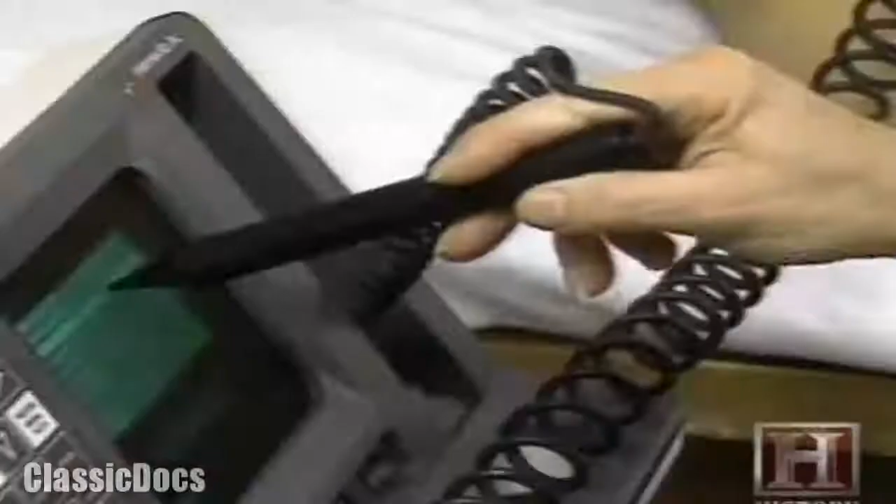Over the next century and a half, we took a world which had dominated us and transformed it into this: an electrified environment which responds to our every need. We control our climate, process information, and tend to our health with power that flows hundreds of miles across an interconnected transmission grid that encompasses the entire country.

Electric current, the flow of charged electrons, intimately influences how we live, yet most of us understand little about how it works.

In 600 BC, the Greeks first discovered that static electricity could be generated by rubbing amber. It wasn't until the 18th century, however, that Benjamin Franklin theorized that electrical fluid might be composed of particles. By harnessing this flow of electrons, or current, inventors and industrialists more than a century later laid the foundation for what would become the colossus of electrical generation, the modern power plant.

It can be anything from a red-hot behemoth that once started consumes trainloads of coal without interruption for years, or it might be a nuclear plant, incongruously perched at the edge of the shimmering Pacific Ocean, a plant that on its own produces 20% of Southern California's energy.

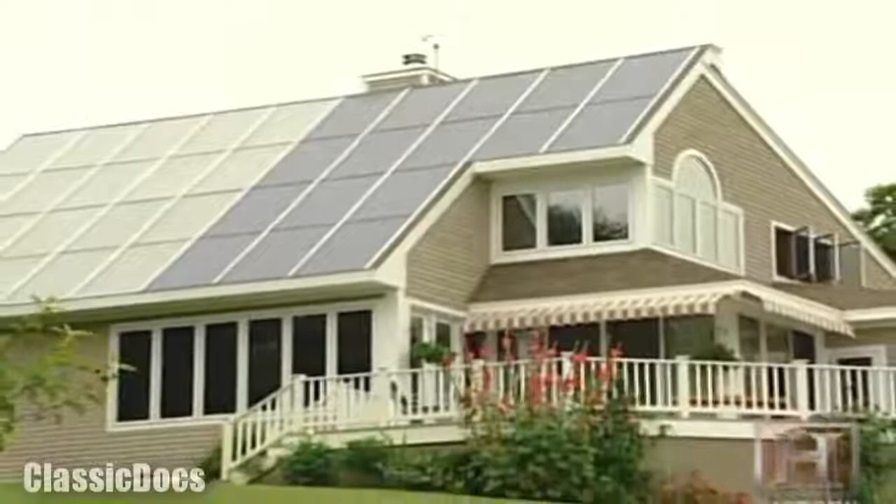Or maybe it is simply this: a house that generates more energy than it consumes and returns that surplus to the electrical grid for public use, a new model for the future of power plants.

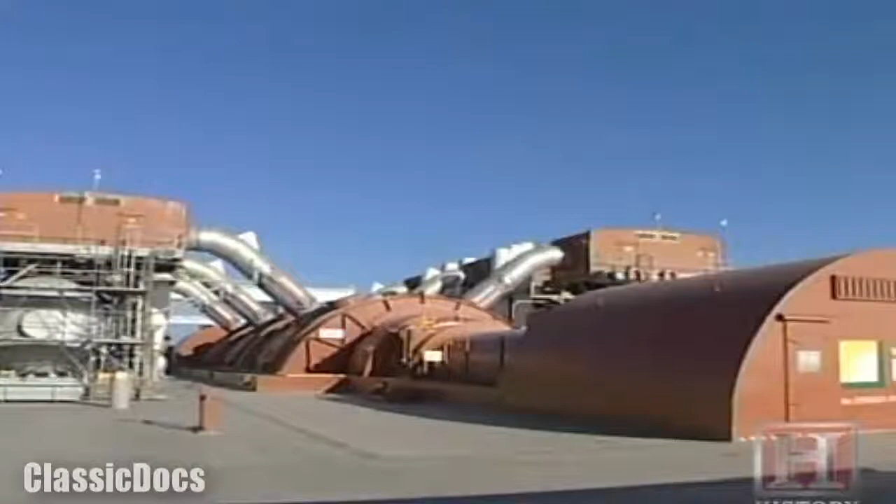But whatever guise contemporary power plants take, the basics of their design and their integration into commercial and domestic life were forged more than 100 years ago in a conflict between two giants of industry and invention, Thomas Edison and George Westinghouse. The outcome of the fierce competition between these two men would ultimately dictate how electricity would be generated and transmitted. But their first battle would be waged over how to bring safer light to the cities of America.

Early natural gas lighting systems in homes, for example, on occasion were quite dangerous. They had no shut-off valves, so if the lamp went out, the gas would continue to accumulate in the home, and they had some major explosions in homes.

In 1879, Thomas Edison invented the first commercially practical incandescent lamp with a high-resistance filament that glowed when heated by a low current. He soon followed this with designs for a complete distribution system for light and power.

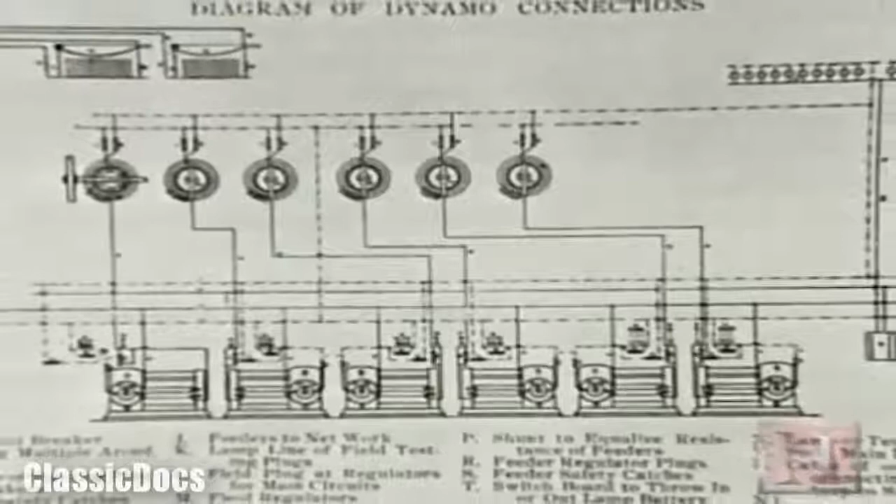On September 4th, 1882, after delays and cost overruns, Edison opened the first electric utility, the Pearl Street Station, in the heart of Lower Manhattan's financial district.

Edison knew that his product was going to be expensive and would need to reach many customers. The whole reason for Edison's Pearl Street Station in New York City in 1882 was to demonstrate that electric technology could be used on a widespread basis, not serving one customer like steam engines in old factories, but many, many customers. Edison's choice of direct current technology at Pearl Street limited his power plant's range.

The major disadvantage to direct current power in power plants at the time was you could not transmit electric power very far without losing a tremendous amount of the current. So you needed a power plant every half mile or mile throughout the city.

Edison's main competitor, George Westinghouse, saw that electricity's future was in long-distance transmission. Westinghouse put his company, Westinghouse Electric, to work at perfecting a system using alternating current, which flows in reversing waves which propagate more easily and with less resistance in a transmission wire.

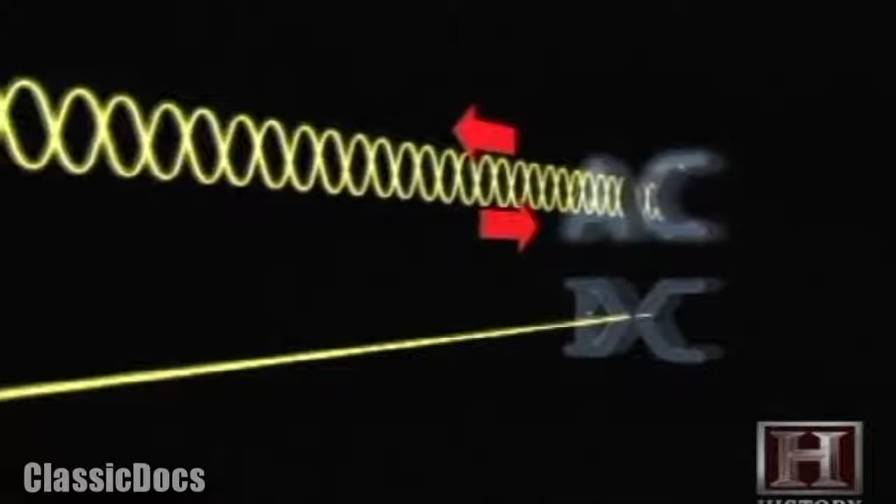The beauty of alternating current is that you can generate that at a very high voltage and then step it down essentially to any voltage that you need. So you could step it down to a very low voltage that somebody would need at a house for their lighting, or you could step it down to a somewhat higher voltage that some business might need or some factory would need.

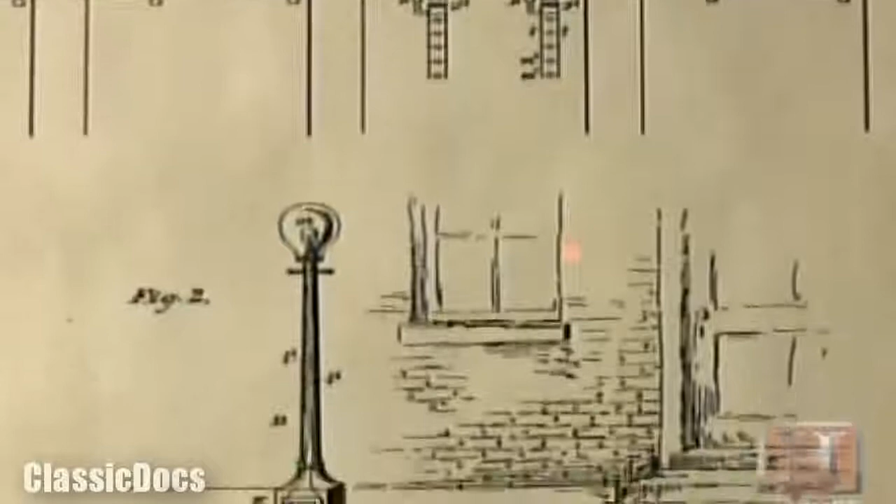George Westinghouse purchased several vital alternating current patents from Nikola Tesla, a Serbian-born inventor. Westinghouse recognized Tesla's genius and brought the inventor to Pittsburgh to work for him. Together, they designed the components necessary to alternating current's success. In 1887, George Westinghouse invented a meter for alternating current.

He thought if you were going to make alternating current commercially available, you were going to have some way of measuring what you're going to sell to your customers.

Westinghouse's aggressive pursuit of alternating current technology put him in direct conflict with Edison. It was a battle of business and technological giants, Thomas Edison versus George Westinghouse. This is called the Battle of the Currents, and it was essential because the technology that won would dominate the industry for the remainder of the foreseeable future. With so much at stake, it's not surprising that the Battle of the Currents took a bitter turn.

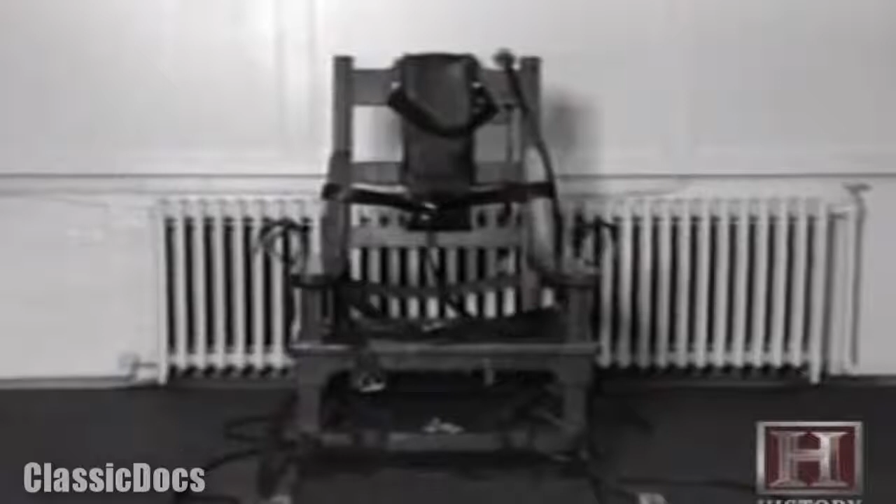Edison went so far as to lobby New York State officials to have his competitor's product, alternating current, used to execute condemned men at Sing Sing prison. I guess perhaps the lowest blow is when they were looking for a word to describe this. Today we say a person is electrocuted, but at the time they didn't have a term, and Thomas Edison suggested that they use the word Westinghoused, that the condemned man was Westinghoused. And obviously it's very, very upsetting to George Westinghouse.

But Westinghouse focused on the industrial competition at hand and left the courting of public opinion to his adversary. There was a great World's Fair coming up in 1893 in Chicago, and they asked for proposals to illuminate the fair, to light it at night, realizing that nowhere in the world had a major event ever been illuminated at night before. Westinghouse bid $500,000, half of what Edison bid, and was awarded the contract.

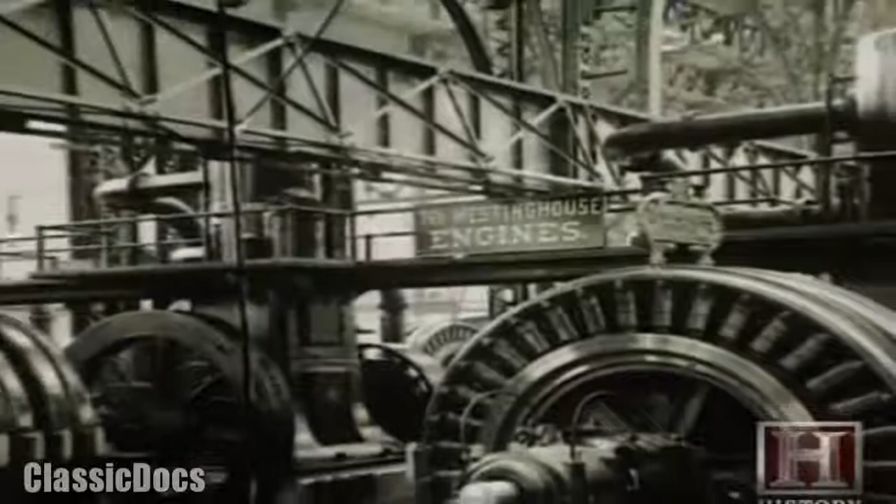He took advantage of the opportunity to promote his product. So he installed a complete alternating current power plant that was on display for everyone to see. It had a giant Westinghouse alternating current switchboard, and the impressive part of that was that there was only one operator. One operator could control all the electrical equipment for the World's Fair of 1893.

27 million Americans and foreign visitors attended the Chicago World's Fair of 1893. Tesla and Westinghouse made sure that they left the fairgrounds with a good idea of who was winning the Battle of the Currents. Both George Westinghouse and Nikola Tesla realized this was an opportunity to really showcase the potential of alternating current. One display, they had this huge word, power, and at night there were electrical currents, just like little bolts of lightning flashing all around this illuminated word.

After this dramatic success, Westinghouse was prepared for his greatest challenge, competing head-to-head with Edison for the right to build the largest power plant in the world.

Niagara Falls. For hundreds of years, men had understood that the power of falling water could be converted into mechanical energy, the energy to run mills. But by the 1880s, there was open debate over whether the falls should be harnessed with this old technology or transformed into electricity and transmitted to industry and individuals hungry for power.

If we look at Niagara Falls and the potential for generating power, it was obvious to a lot of intelligent men at that period of time that there was a tremendous amount of power in the water coming down over Niagara Falls. If it could be harnessed, it could do great things for industry.

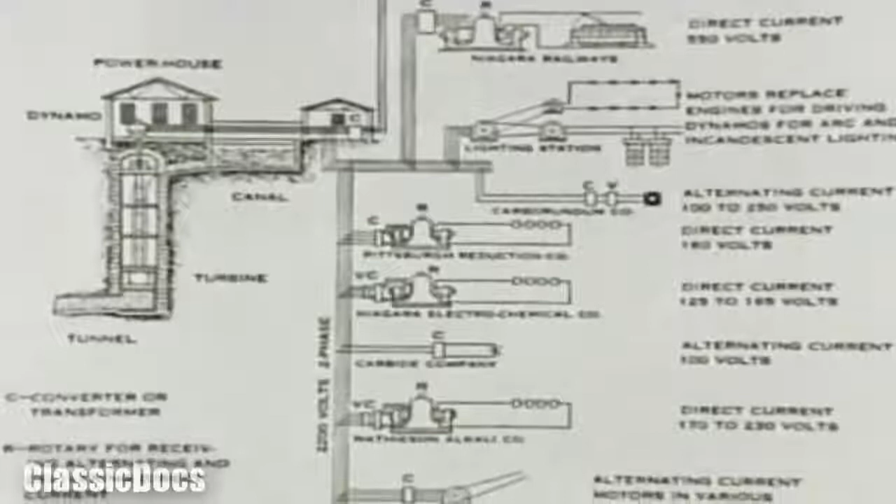The International Niagara Commission solicited plans from leading engineers to design a plant that could transmit electricity to nearby Buffalo's manufacturing interests. This was a dramatic opportunity for George Westinghouse's alternating current system. Ultimately, the decision to choose alternating current, which could be pushed much further distances over transmission lines from the powerhouse, won the day for alternating current.

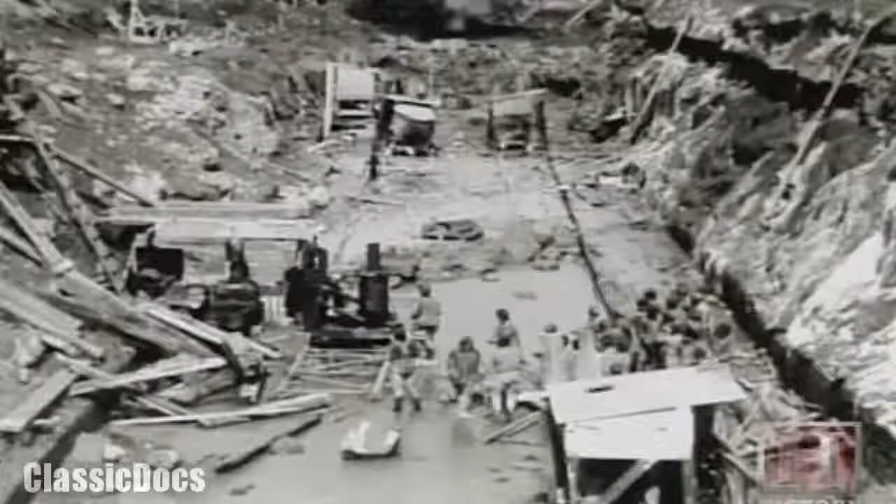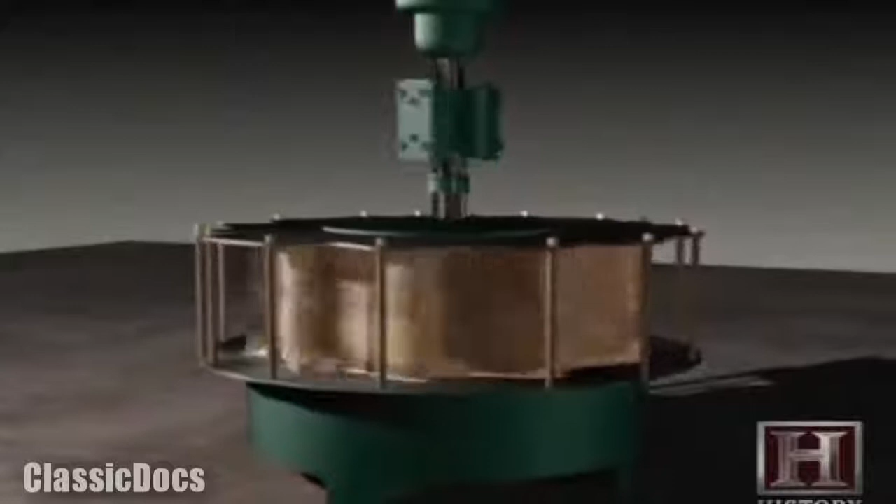It took from 1892 to 1895 to build the tunnel that would divert the force of the Niagara River to the plant's turbines. During the summer of 1894, electric cranes eased the 29-ton turbines, the largest built to date, into the wheel pits. The turbines were essentially windmill blades that could be driven by the force of Niagara's water.

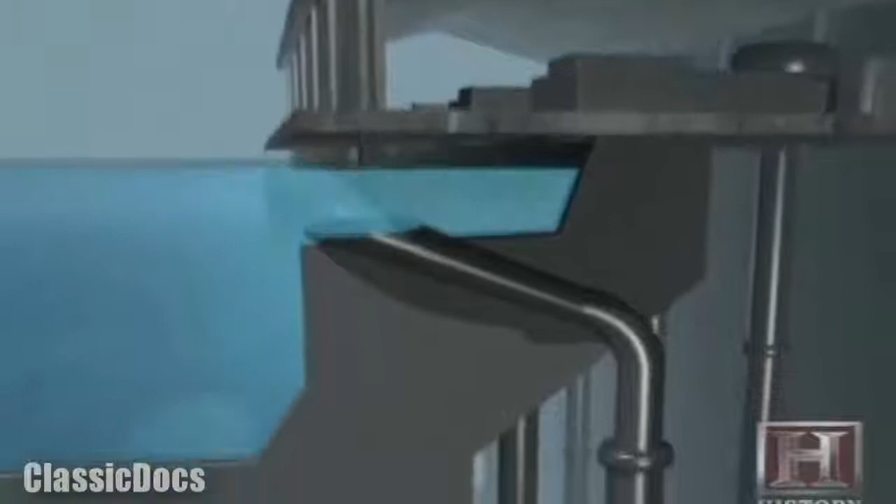When the plant was finished, water flowed through the forebays and into the penstocks, vertical pipes about 8 feet in diameter, before entering and driving the turbines, which in turn spun rotors beneath the generators. Inside the generator, a magnet spun, creating a magnetic field which induced an electric charge in a casing of copper coils, thus producing electricity.

In 1896, the Niagara Power Station began transmitting power 17 miles to Buffalo, New York. But it wasn't until 1901 at the Pan American Exposition on the Buffalo Fairgrounds that the general public was able to witness a large-scale display of the wonder of long-distance electrical transmission. In order to transmit electricity over this distance, transformers at the plant increased voltages to 11,000 volts, 4 times the voltage of an 1891 plant that Westinghouse had built.

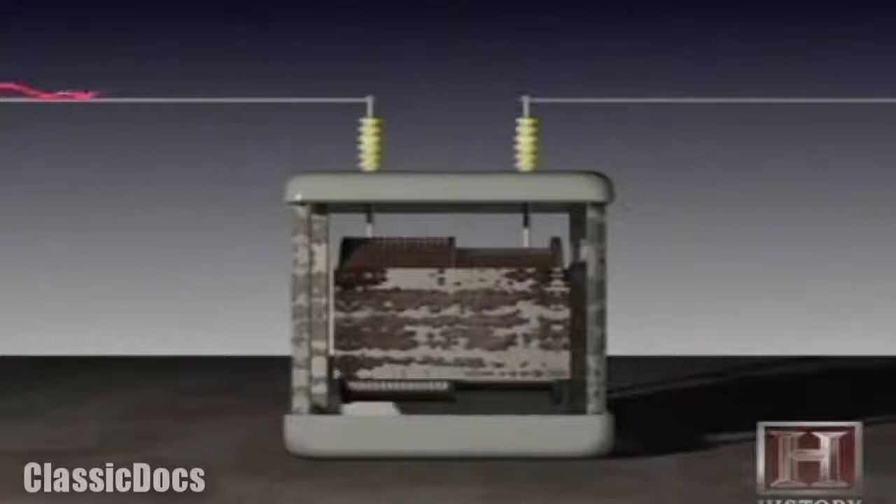Inside a transformer, an electric charge passes through one wire coil, inducing a higher or lower charge in another separate coil. Voltages multiply at the ratio of the number of turns in the secondary coil to the number of turns in the primary coil.

What the Westinghouse engineers understood very clearly was that large power plants, which could produce large amounts of electricity and serve larger numbers of people over a wider area, needed the use of transformers to increase the pressure of electricity, to be able to push it longer distances.

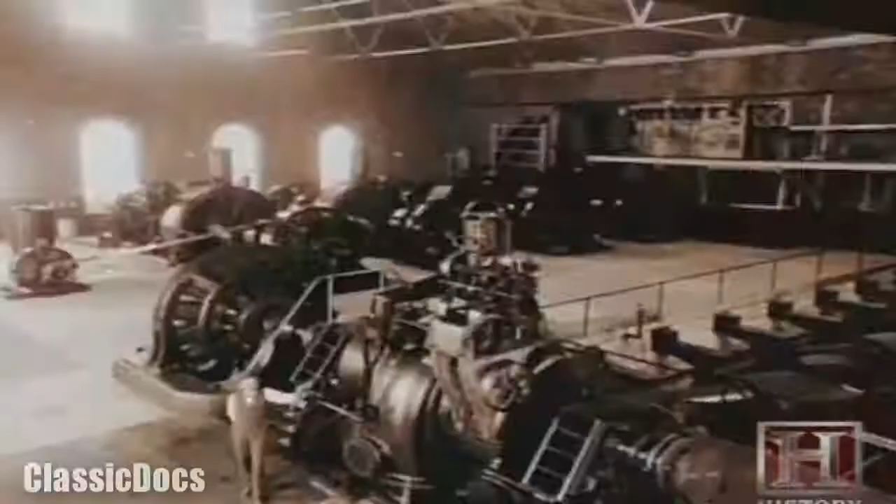The Niagara Power Plant provided not only a technical blueprint, but also an economic model that would be duplicated time and again over the coming century. If you build it, they will come. Heavy industry, in this case, would congregate around a reliable, cheap energy source.

There was a fellow in Pittsburgh named Hall who had an early process for producing aluminum using electricity. So he moved his company from Pittsburgh to Niagara Falls. When the power became available, that company went on to change its name to Aluminum Company of America, and as we know today, it's the largest aluminum company in the world.

It soon became clear as electricity flowed out of the Niagara Power Plant that alternating current was here to stay. After Niagara, even Edison abandoned DC for AC technology. I think it would be very fair to call George Westinghouse the father of the modern power plant. He was the catalyst, the person who had the commitment over this 10-year period of time to pool the resources to make alternating current successful.

In the ensuing decades, improvements in the electrical engineering of turbines, generators, and transformers would lead men to dream of a bigger and better source of water power. This dream would culminate at Hoover Dam, 40 years after the first electricity flowed out of Niagara.

At 726 feet in height, weighing in at 6.5 million tons, and forming a 150-mile lake, Hoover represented a stunning increase in scale to Niagara and is still one of the world's largest dams. Hoover's transmission voltage of 287,000 volts speaks to the engineering leap that had taken place.

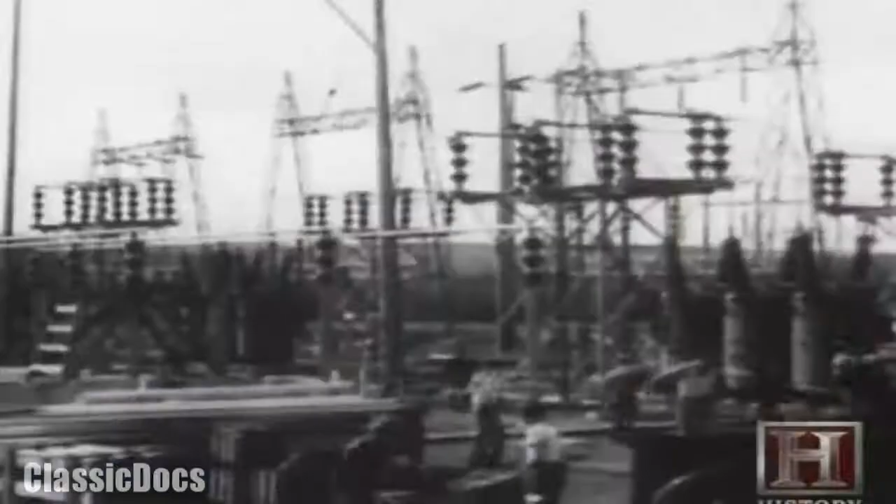A number of people compare Hoover Dam with the earlier Niagara Falls installation. The difference between the Niagara Falls of the early 1890s and the Hoover Dam in the mid-1930s is the improvements in technology over that period of time: larger, much more efficient generators, and most importantly, very high voltage or high pressure transmission systems.

Whereas people 17 miles away from Niagara Falls could receive electricity in the early 1890s, by 1936 and 37, when power was coming out of Hoover Dam, it was going over 250 miles to Southern California.

In the decades between Niagara and Hoover, privately owned power companies flourished throughout the country. It did not take long for company owners to realize that consolidation was the only way to profit in an industry that required so much investment to build infrastructure.

Tom McCarter had been the Attorney General of New Jersey. His idea, which was very novel at the time, was to basically draw a line between New York City and Philadelphia and buy up all the municipal light and gas companies and traction companies that existed between those two major points. By doing so, he was able to generate the critical mass necessary to go out and begin to fund the tremendous infrastructure that was going to be required to build the electric system.

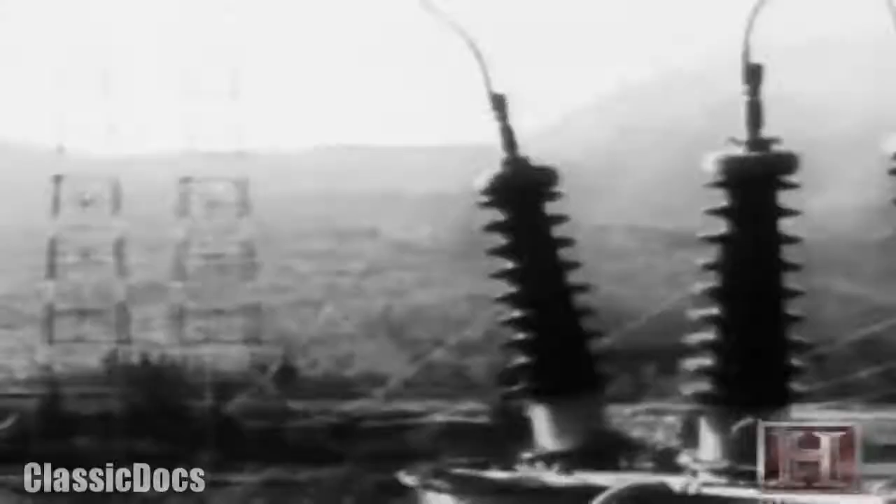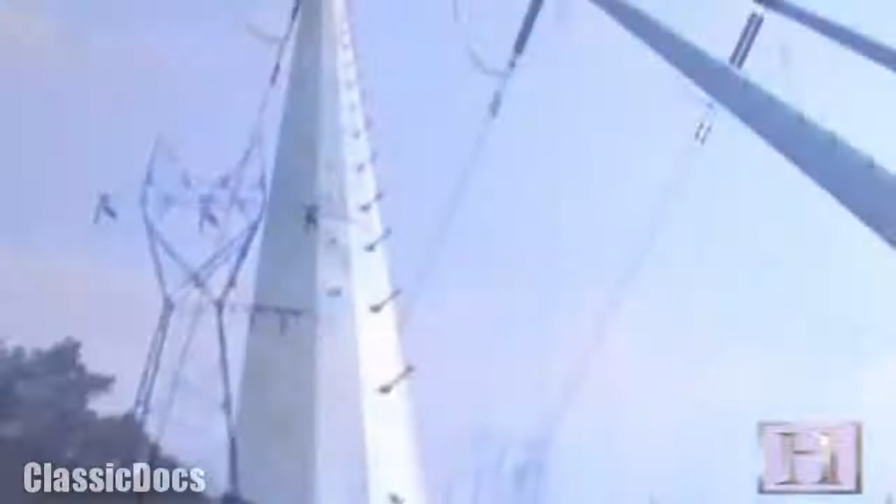It was also a major step in the growth of the transmission grid. More customers meant greater revenue, and an expanding utility could afford the expense of running transmission lines, linking multiple plants into a regional grid. This system spawned the giant interstate power transmission grids that today cover thousands of square miles.

Improved transformer technology and higher voltages meant electricity could be sent farther and farther. By 1908, you had over 100,000 volt technology, which meant you could push that electricity 150 miles or more. By the early 1920s, you had 220 and 230,000 volt technology, which meant literally anything within a range of about 300 miles of the power plant could receive electricity.

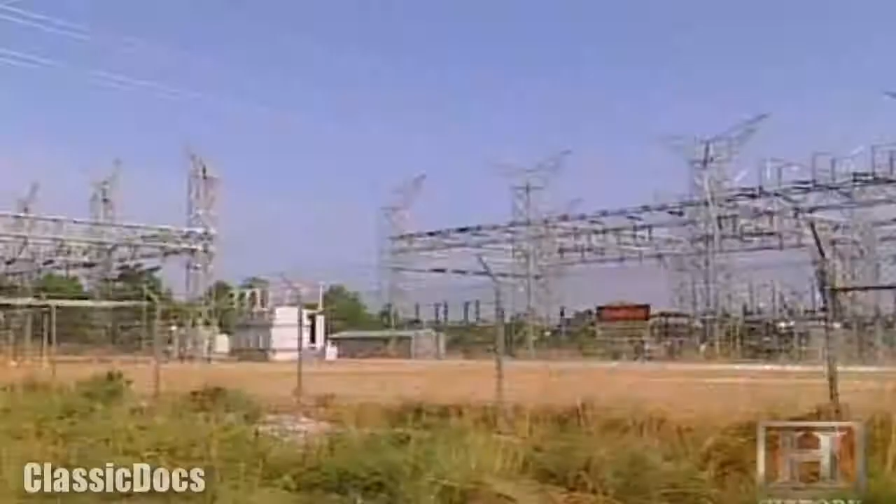The workhorse of this grid is the transmission substation, like this one outside Athens, Georgia, where the job of increasing and decreasing voltages is done.

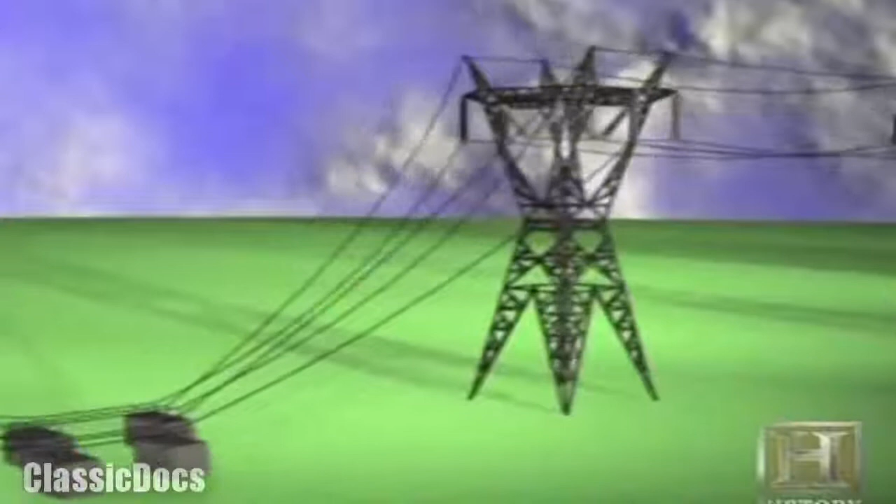Our network grid system is based on about 3 main voltages, and then we go to some lower voltages for shorter routes. The network system is basically 500,000 volts, 230,000 volts, and 115,000 volts. The 500,000 volts is basically like an interstate system—it travels from state to state, and there's about 5-6 main arteries across the state. The 230 kV system is sort of like the U.S. highway system. There's more routes, but still not the largest number.

There's the largest number, the 115,000, which is more like the state highway system. It carries power from town to town, all over the smaller towns, medium-sized towns, and to other areas to feed different loads.

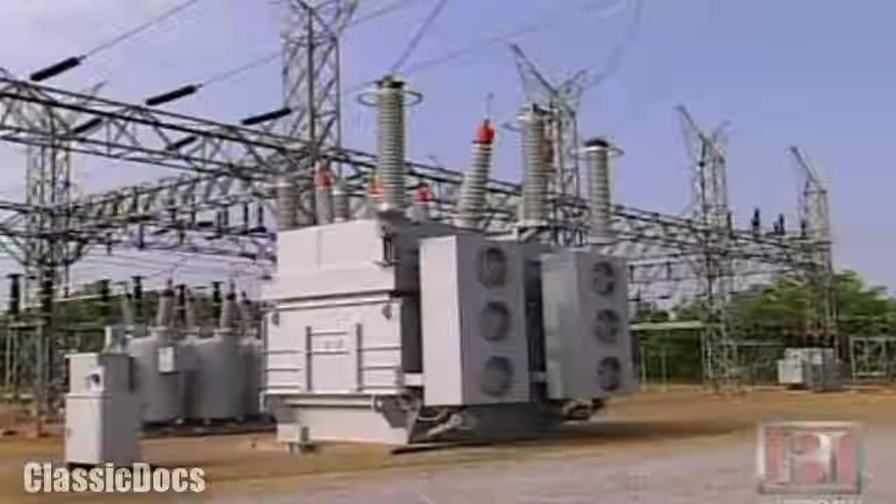Transformers at the substation alter the voltages so that electricity can be routed where it needs to go. We're standing in front of the 230 to 115 kV transformer, the big box here. The transformer converts the 230 kV voltage down to 115,000 volts, and then supplies power to the 115 bus, which is then shipped out across the 115 kV grid.

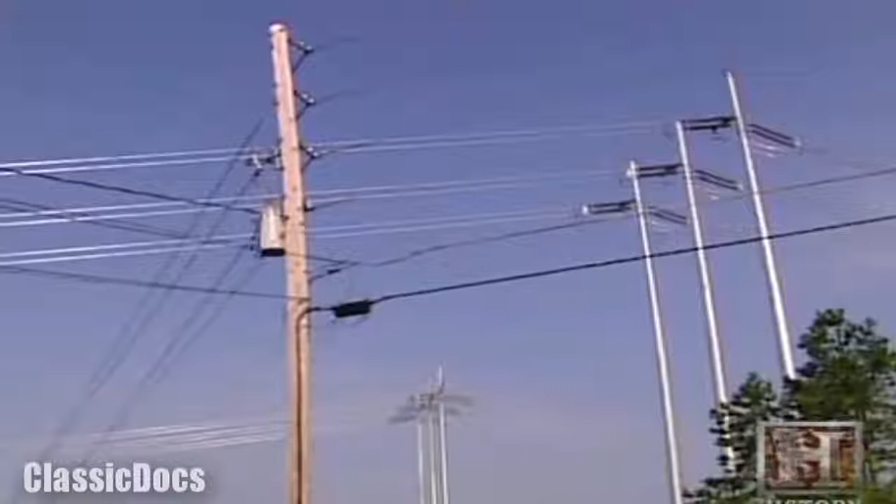Electricity flows along the 115 kilovolt power line and gets stepped down as it nears its destination, private homes. This is a typical distribution transformer serving a home. Distribution lines run either 12,000 or 25,000 volts. It's stepped down to 120 to 240 volts to feed the house for normal television, lights, appliances, everyday use.

This kind of everyday use has fueled the demand for power throughout the century, as consumption and desire for comfort have grown. To meet society's runaway electrical needs, utilities built their bread and butter plants.

Next, what eats 36,000 tons of coal a day and never needs a rest? On 2,000 acres in Bartow County, Georgia, sits the second largest coal-fired plant in the United States, Plant Bowen. Owned and operated by Georgia Power, the facility produces in 15 seconds all the electricity a home will use in a year.

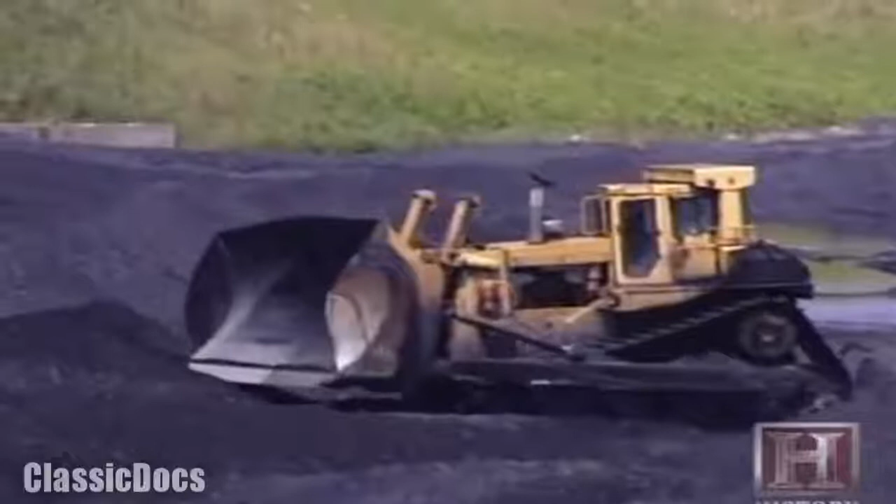With the exception of hydroelectric power in water-rich states, most of the country's electricity has been generated at coal-fired plants. In its heyday, coal was as plentiful as environmental concerns were scarce. Investment flooded into utilities, and coal plants grew bigger and more efficient. Power plants went from small cottage industry to big, massive power plants.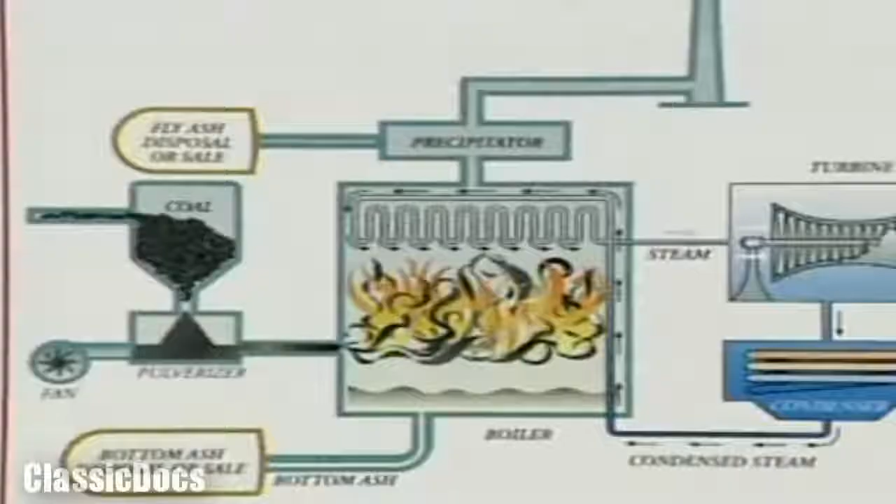They were taking this steam cycle and really wringing every ounce of energy from it that they could, and doing so in a very efficient way. Basically, the way you generate electricity: you take water, and the simplest cycle is you boil it, and you create steam, and you pressurize it with this amount of heat that you're introducing into it, and you put it through a turbine. The turbine is a simple fan, and as you introduce the high-pressure steam, it turns a generator.

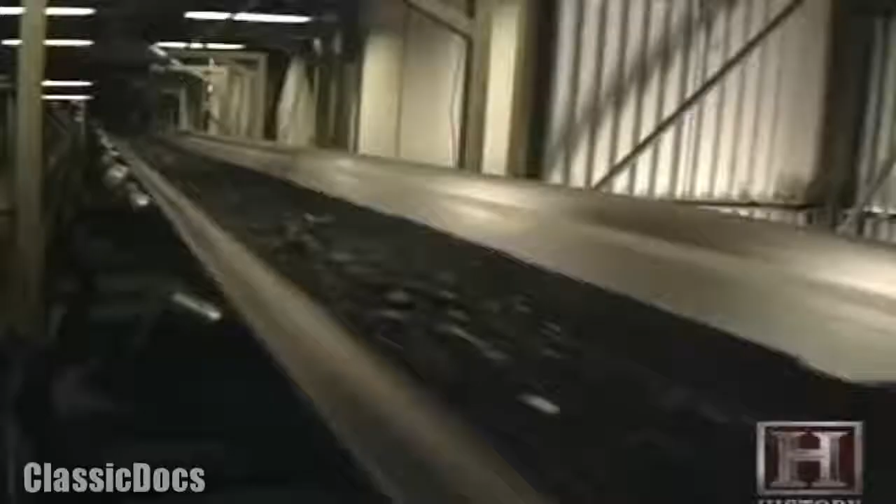But this simple steam cycle was wasteful. It would take about 10 pounds of coal to produce the amount of energy that it would take to light a 100-watt light bulb for an hour. That's a very significant amount of coal. Today, through technological changes, we've been able to bring that down where now we're far under 1 pound of coal to produce the same amount of energy.

It took a combination of disciplines to affect this kind of fuel efficiency. You had the power plant engineers refining that process, increasing the thermal efficiency, finding out how to use fuels in a more efficient way. You had metallurgists working on piping that were trying to bring temperatures up higher. You had boiler feed pump folks working on producing tremendous amounts of pressure. All this to supply energy to a growing population and industrial base that demanded more power.

Engineers call this demand load, and this load changes depending on the season and time of day. Load is the electrical demand on our system. If you turn a light bulb on, that is putting a load on our system. It's putting a demand for the use of electricity.

The use of power goes up dramatically during the day, particularly today with air conditioning, so that you have very low levels of load at 8 o'clock in the morning. It goes up higher and higher in the morning period, and then about 3 o'clock in the afternoon, everybody's air conditioning is working at its maximum, industry is working hard, and that's the maximum peak load.

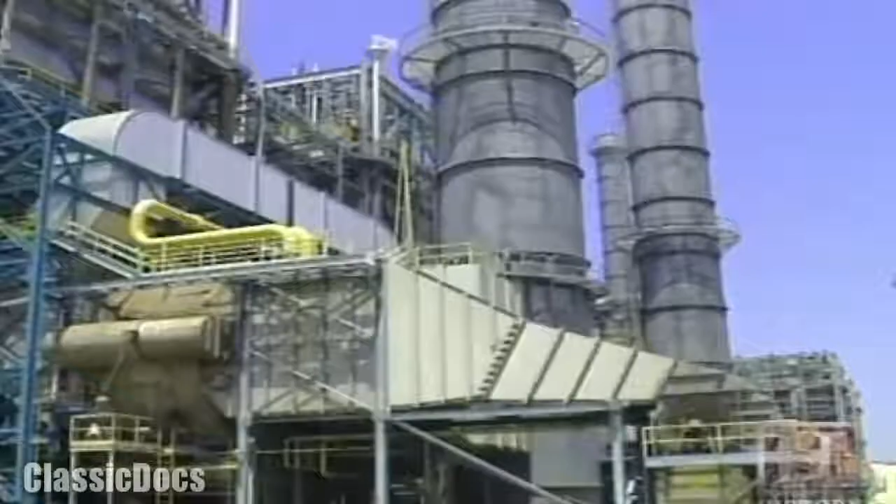To service this energy cycle, a utility needs 3 types of plants. You have base load, which is 24-hour load, and that's a plant that can run full-time. You have intermediate load, which is a plant that will cycle. It'll come on in the morning, and then at night it'll shut down. And then you have peaking facilities, which run really for just a few hours a day. You need 3 different kinds of machines to cover those loads.

Plant Bowen is what we call a base load power plant. The economics of operating it are such that it pretty well runs day in and day out, 24 hours a day. It takes 4 9,000-ton train loads of low-sulfur coal arriving from eastern Kentucky each day to supply the plant. The coal is pulverized to the consistency of talcum powder before being blown into the boilers to be burned to heat water.

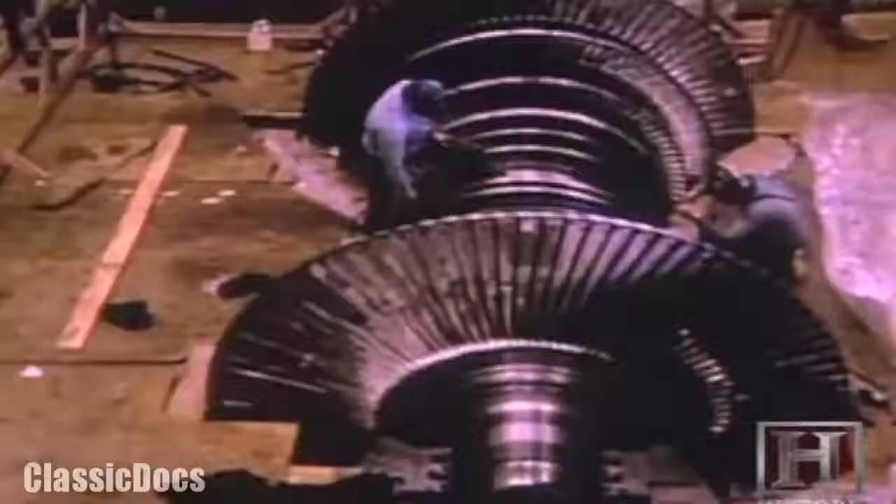It's turned into steam that has a temperature of 1,000 degrees and a pressure of 3,500 pounds per square inch. This steam is delivered to a turbine, which turns a generator attached to it. The generator and turbine spin at 3,600 RPMs, generating electricity that we put out on our transmission line.

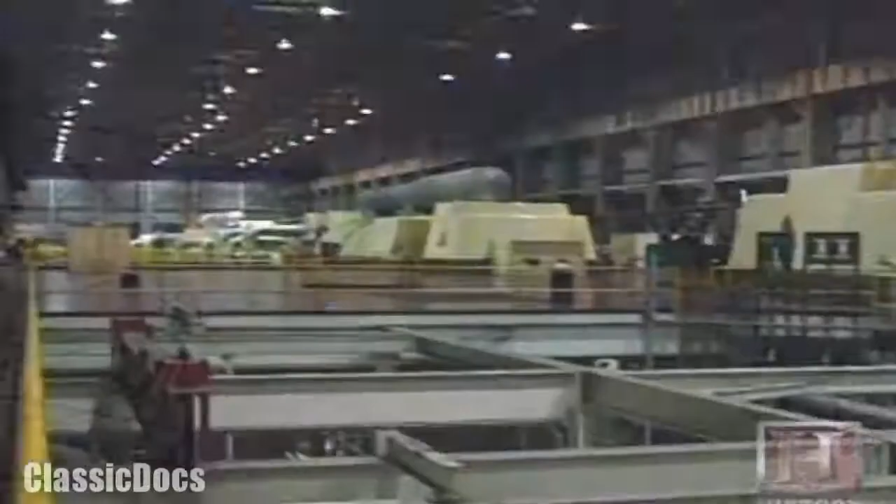Once the steam has done its work in the turbine, it enters the condenser, where it flows over 36,000 copper tubes containing water from the nearby Etowah River. The river water absorbs heat, condensing the steam back into water so it can be reused in the boiler. Hot river water is then cooled in 400-foot-high cooling towers, each tower cooling 300,000 gallons a minute.

Not surprisingly, it is no longer possible to find communities who will welcome a plant of Bowen's scale, with its looming 1,000-foot-high stacks.

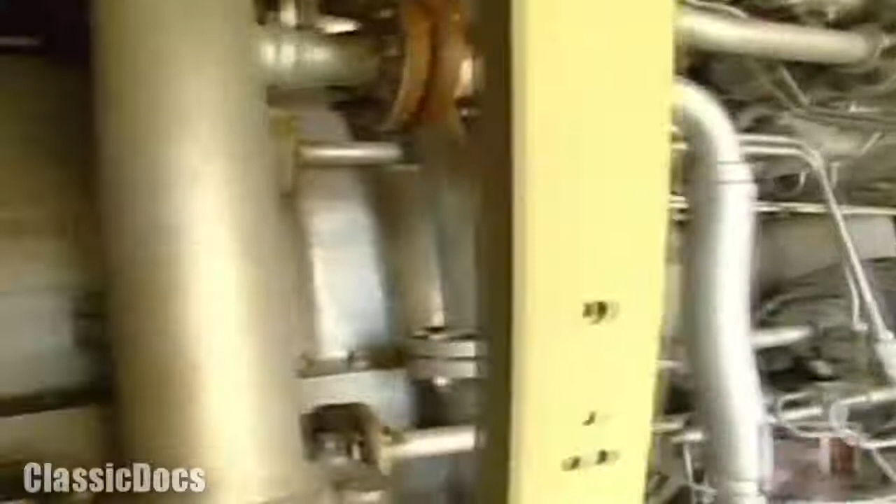As a result, utilities like Georgia Power have developed peaking facilities with much smaller footprints, both in terms of land use and environmental impact. Combustion turbine plants like Plant Dahlberg in northeast Georgia burn natural gas or fuel oil instead of coal, in what is essentially a souped-up jet engine.

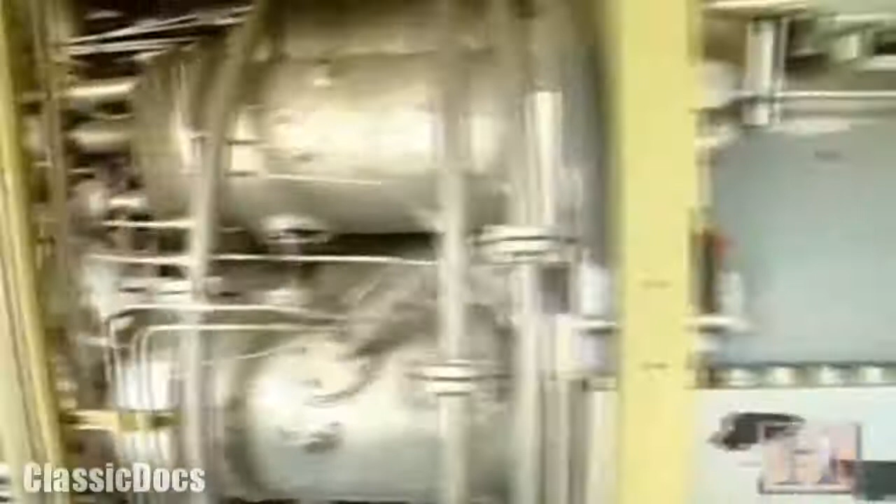The gas turbine engine uses hot air, not steam, to produce electricity. Fuel mixes with air, is burned, and the expanding gases drive the turbine. Once the turbine spins, the process is much the same as in a steam cycle plant.

The technology for this type of unit with the combustion turbine is very similar to what you'd see on a jet engine. The jet engine has a compressor, brings air in, compresses it, burns it, and produces the power they use in thrust. This is a much larger machine doing the same thing. It's been equated to a jet engine on steroids.

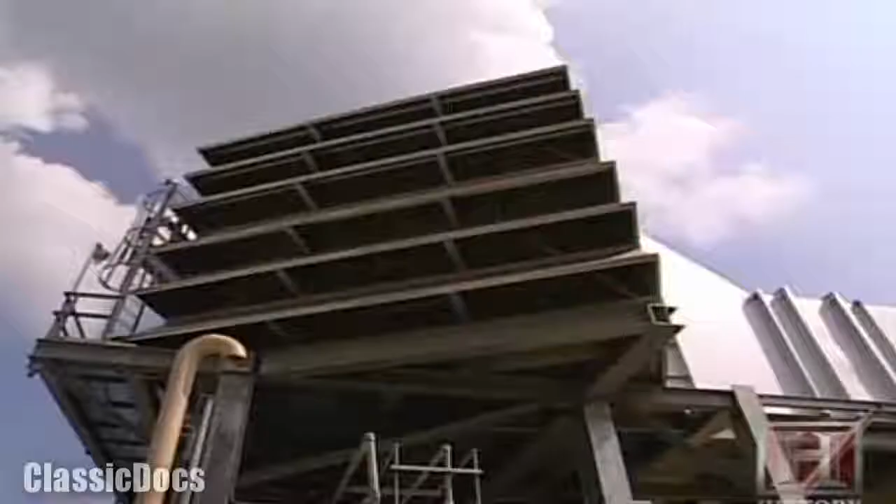Plant Dahlberg's 8 units combined produce about 600 megawatts of energy, less than the output of a single unit at Plant Bowen. As a result, the turbines are only used to produce supplemental electricity when it's needed, to provide energy to get you through the high demand period of the day.

Today, the energy market and societal pressures for safer, cleaner power have created a demand for smaller plants that are more evenly distributed on the landscape. This is changing the shape of an industry whose motto had always been, bigger is better.

Built during the years that followed the Depression, those bigger plants produced more power, but in the 1930s and 40s, rural farms had no way of tapping into that power. Remote, expensive to reach with transmission lines, they simply were not on the grid. Investor-owned utilities primarily did not want to go to the cost of providing electricity to rural customers, because you would face the cost of building power lines, in some cases 100 miles long, that would only serve maybe 4 or 5 customers. No return on your investment.

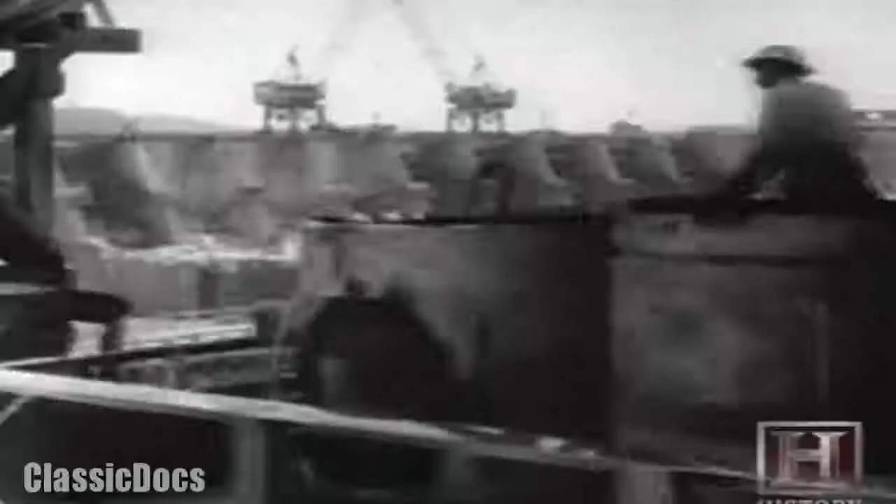President Roosevelt and the Congress established the Tennessee Valley Authority in 1933, and the Rural Electrification Administration in 1935. The agencies shared the goal of bringing electricity to rural America, where only 10% of farms had power.

The TVA ostensibly began as a flood control effort by the Army Corps of Engineers, but it was quickly used as a way to find new sources of hydroelectric generation on the rivers of the area. Dams were built, ultimately totaling 42 in the system, and a massive hydroelectric power project was launched, which grew to a total capacity of 4 million kilowatts by the 1970s.

By this time, the mission of the REA and the TVA had been accomplished. 98% of all farms in the United States had electric service.

Once the TVA had exhausted the hydroelectric possibilities of the river basin, administrators turned their attention to other forms of power. In later years, the TVA moved away from its hydroelectric base and actually was a pioneer in the scale-up of some of the coal-fired boiler technology we see today, and became a diehard proponent of nuclear power in the 50s and 1960s.

Next, the half-life of nuclear power: how a technology grew up and got old before its time.

In 1942, Enrico Fermi created the first self-sustaining nuclear chain reaction in a lab hidden beneath the football field at the University of Chicago, and in doing so, launched the atomic age.

In an atom bomb, a sufficient quantity of weapons-grade plutonium is imploded by a TNT charge, initiating a chain reaction or fission explosion.

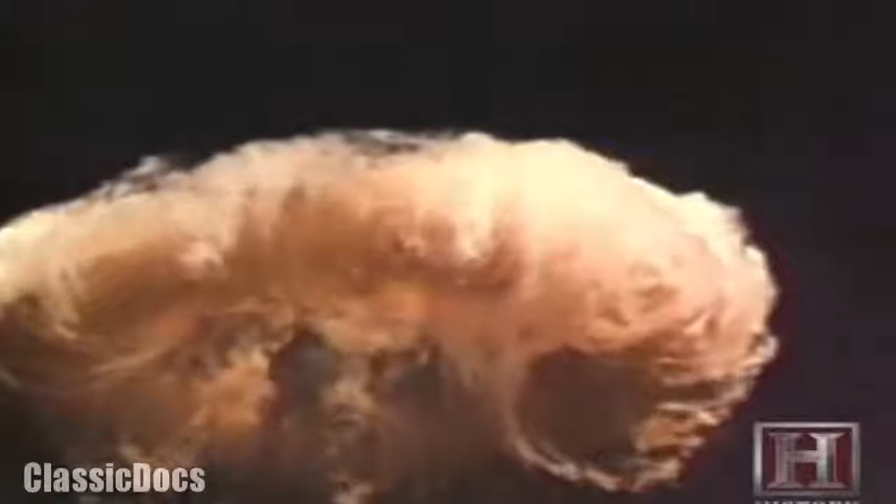Fission is the process in which natural radioactive elements, like uranium, are bombarded with neutrons. By being bombarded with neutrons, they split into other elements, and when they split into other elements, they release energy.

Fortunately, not all nuclear reactions end in devastation. It was the peacetime harnessing of atomic energy that spawned the nuclear power industry. The first privately financed and commercial nuclear power plant built without government help was the Dresden 1 facility outside of Chicago in 1959. If you think of the Manhattan Project, the atomic bomb, and the ending of World War II, the advancement in that technology over a 10 to 15 year period was pretty dramatic.

Today, more than 100 nuclear power plants are operating in the United States, supplying 20% of the country's energy needs. San Onofre is what we call a baseload power plant, which means it tries to operate 24 hours a day, 365 days a year at full power output, which in the case of each of these reactors is a little over 1,100 megawatts of power. The San Onofre Nuclear Generating Station in California's San Diego County supplies energy for 2.5 million homes and businesses.

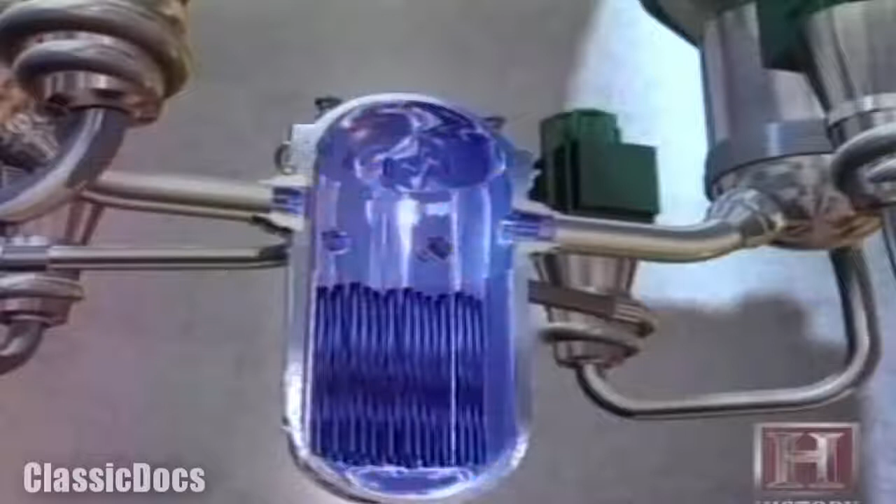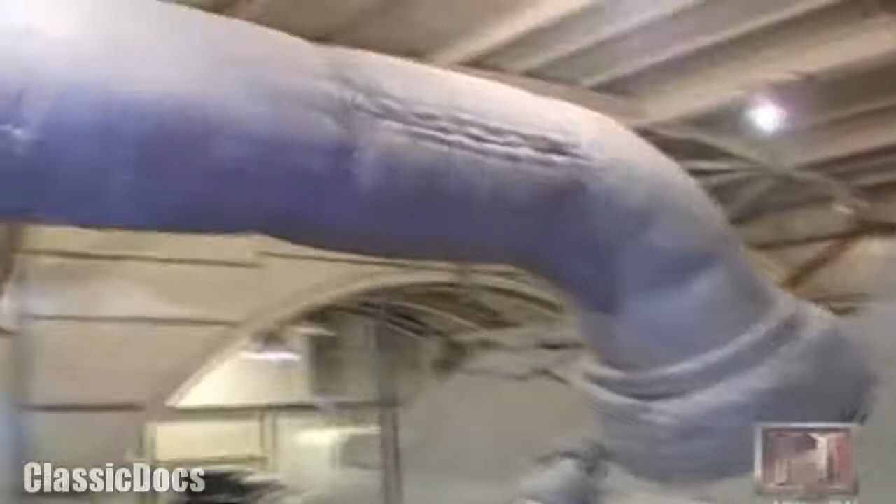The reactor and its circulating system are filled with water, which submerges the fuel core. If you were to put a thermometer on the fuel assembly itself, it would be in excess of 600 degrees. As the water circulates by that hot uranium, the water gets hot, comes out the other side, and goes into two very large devices called steam generators. The steam drives the mechanical turbine, causing it to rotate at 1,800 revolutions per minute.

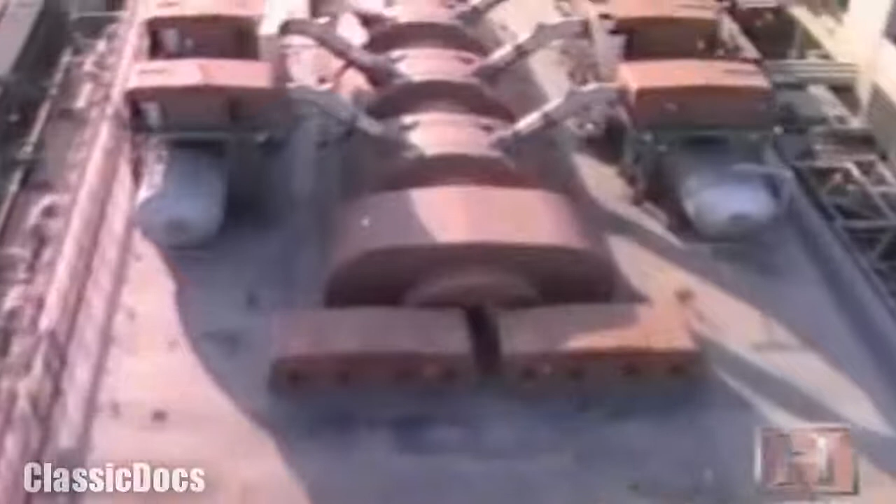That in turn turns an electric generator, and electrons are forced through wires, making electricity to power homes and businesses. The row of turbines and the generator together weigh in at 800 tons, the equivalent of 800 Volkswagen Beetles. But despite this massive scale, it's still a fundamental process.

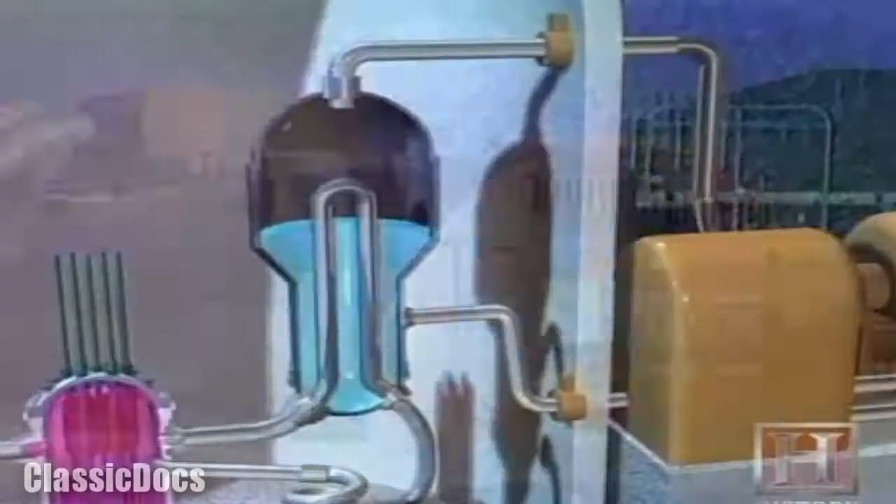As radioactive water from the reactor flows through the steam generators in a closed system, it heats clean water in a second closed system before returning to the reactor. The clean steam drives the turbine and is then cooled by ocean water before returning to the steam generator, where it will again be turned into steam.

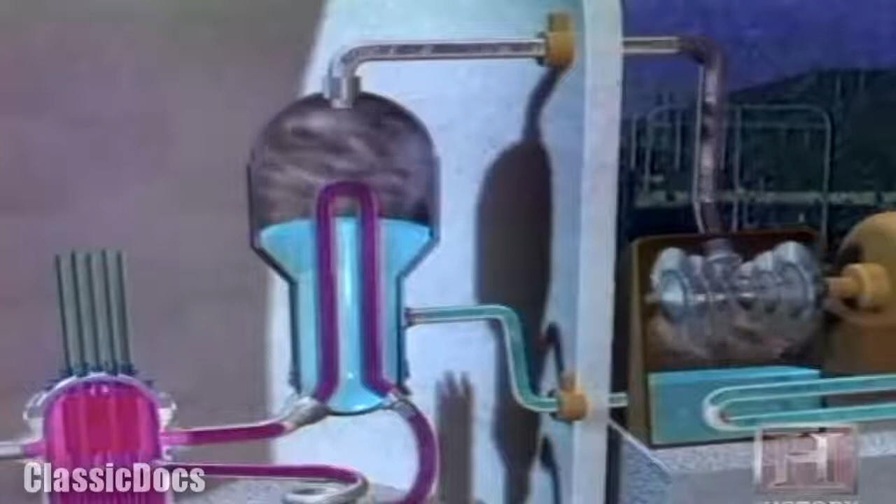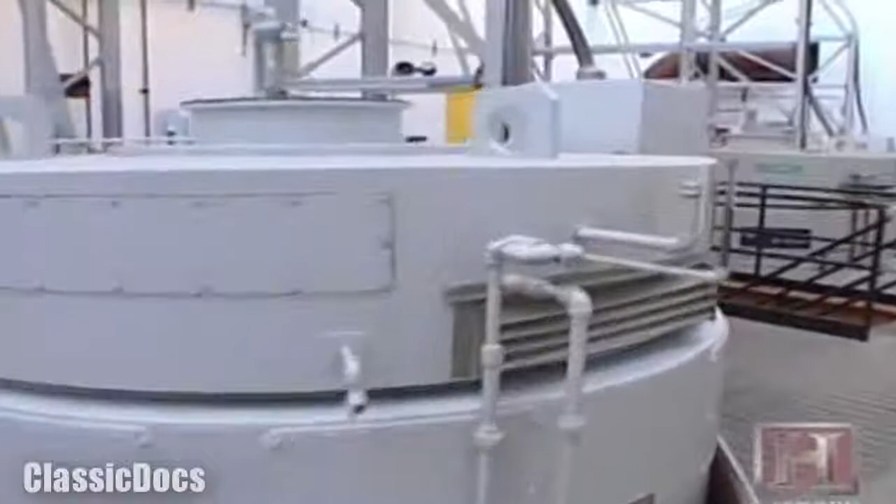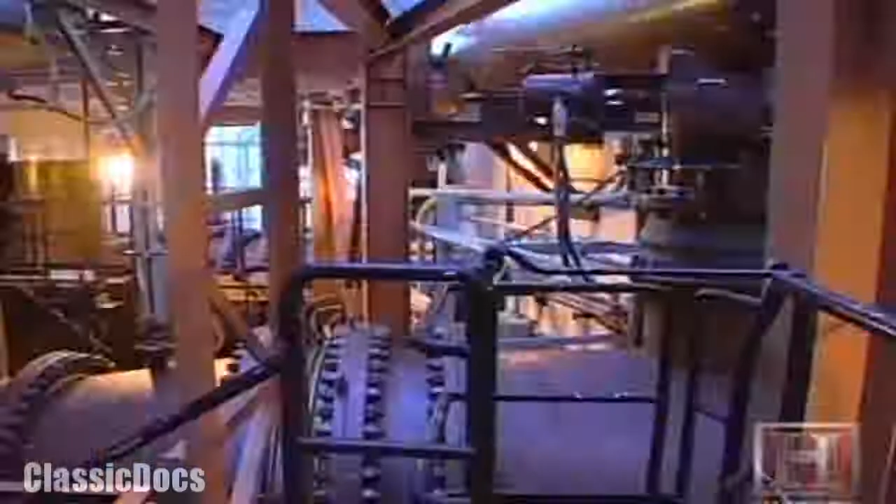Behind me, obviously, is the Pacific Ocean. About 3,200 feet offshore, we have a 16-foot diameter pipe in the ocean, and when we turn on the pumps, we draw in about 1.6 million gallons of water per minute. The pumps are run by 4,000 horsepower motors, the equivalent of 6 NASCAR cars running at full speed. Each pump is capable of draining an Olympic swimming pool in 15 seconds.

If for any reason engineers needed to stop a nuclear reaction, they could do so by lowering an array of control rods into the core. The control rods absorb the atom-splitting neutrons that are driving the chain reaction, bringing it to a halt.

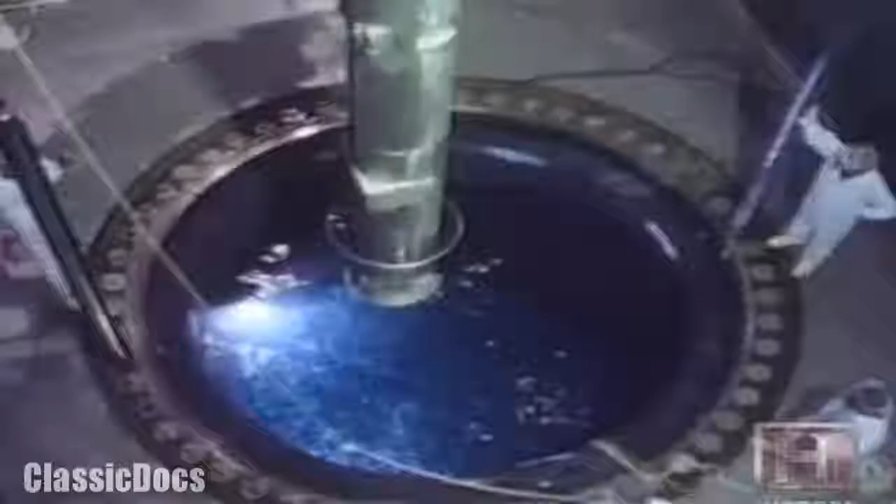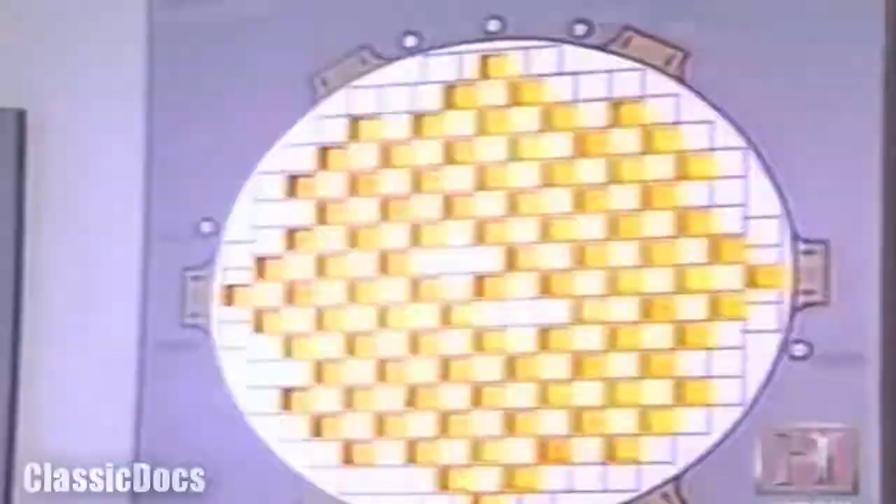But the surprising aspect of this plant is that, to a great degree, it runs without stopping. It can run for 2 years without needing new fuel at full output. San Onofre Unit Number 2 has been operating for about 530 days consecutively. If this was a natural gas plant, an oil plant, or a coal plant, we'd constantly need to bring in trains or pipelines bringing in this fuel product.

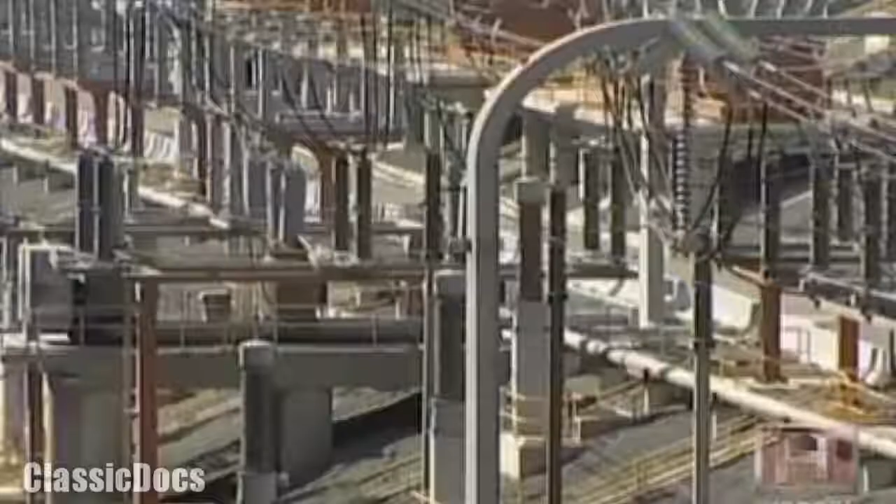Outside, transformers step 22,000 volts of electricity up to 220,000 volts, essentially pressurizing it for transmission throughout Southern California.

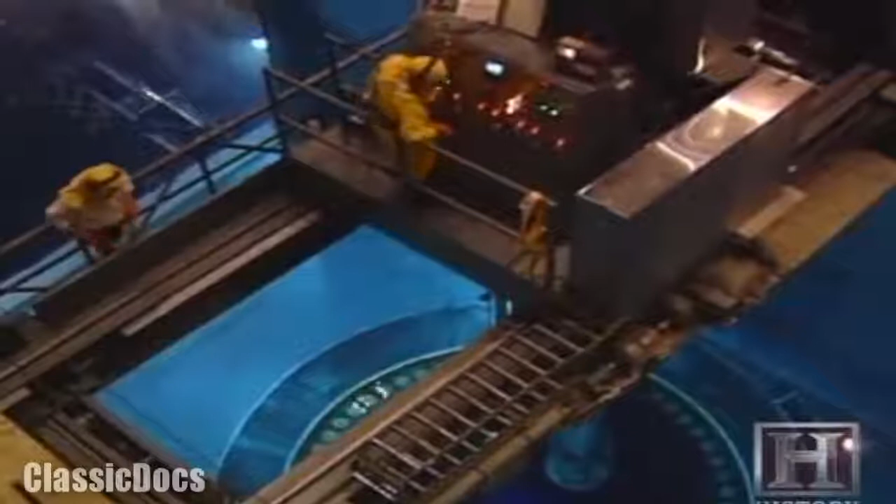Although nuclear power is a relatively new and seemingly successful technology, it has yet to recover from an accident in Harrisburg, Pennsylvania. The most significant event from a safety standpoint that has ever happened in the U.S. nuclear power industry was the Three Mile Island accident in 1979.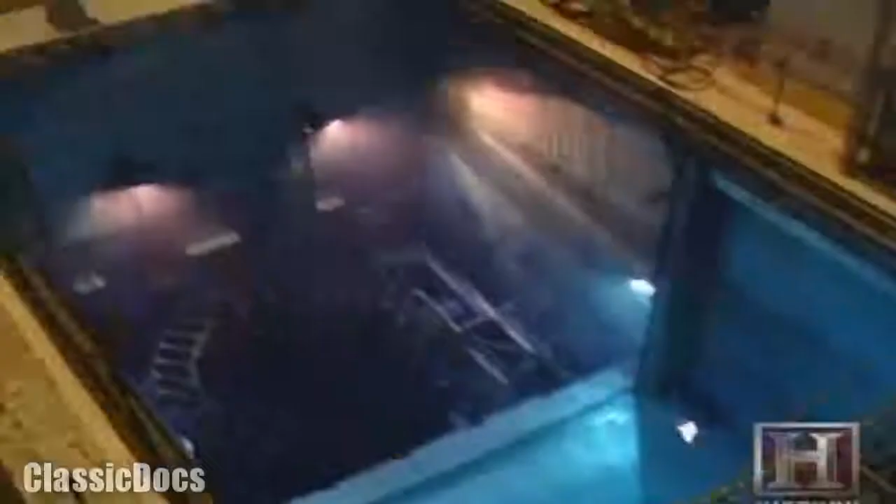This was literally a brand new reactor with brand new operators. At 4 o'clock in the morning, because of a combination of human error and mechanical design, they allowed the reactor's core, the uranium, to be uncovered for several hours. Without any water to keep the uranium cool, the uranium overheated and actually melted.

Evidence suggests that fallout from the accident was low, but the public relations setback was immense. No new plants have been built since.

However, most nuclear power advocates predict that the industry will stage a comeback. In my opinion, there will be a rebirth of nuclear power. It's not a question of if, it's a question of when. Proponents suggest the question of what kind of waste we want in our environment may well be nuclear power's most convincing argument.

Nuclear power in the United States supplies about 20% of the electricity in the whole country. That would probably surprise most people that it's that high. In that 20%, that avoids, on a yearly basis, the emission of about 177 million metric tons of greenhouse gases that would be emitted into the atmosphere if that 20% nuclear power was replaced with coal or oil.

I would say that in the next 10 to 20 years, you will see the percentage of nuclear power rising, because that's a good way to address the global warming issue, and you do not have any solid waste other than the radioactive waste that you have to deal with. But I feel like we'll figure out a way to manage that problem.

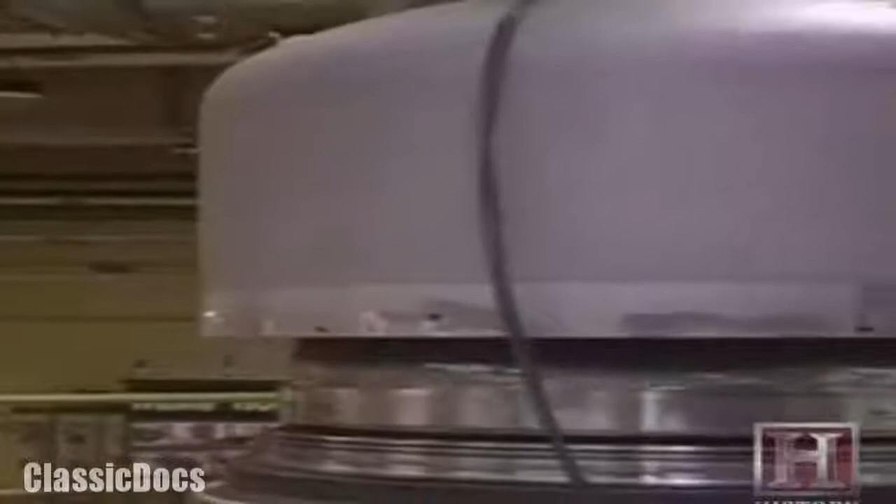Perhaps. But the 3,000 tons of spent fuel that the industry produces each year has no permanent home and is simply being held at the nuclear plants that produced it. Since this waste will remain radioactive for thousands of years, it's not surprising that most elected officials continue to say, 'Not in my backyard.'

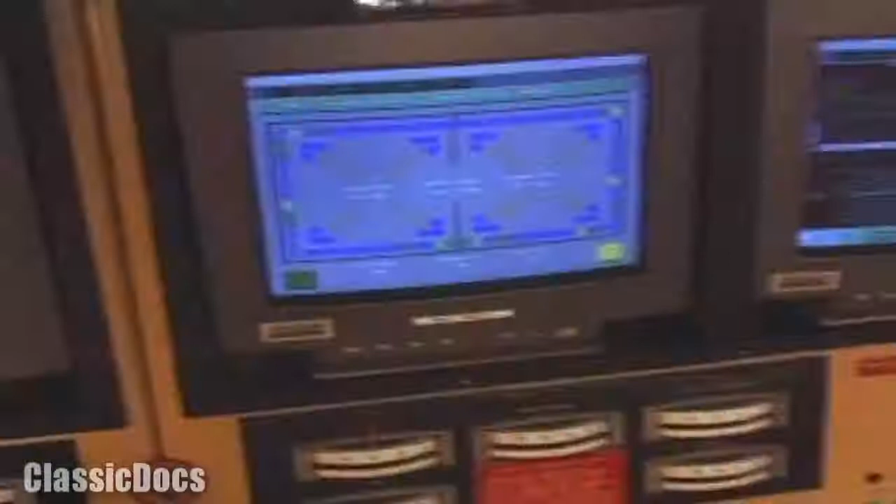Next, electrical consumption grows as interest in conservation wanes. How will power plants of the future meet the demand? Although the history of power plants is largely one of growth and technological triumph, the future of electrical generation could not be more uncertain. What is clear is that we have come to a crossroads where environmental concerns, unchecked consumption, and technological limits meet.

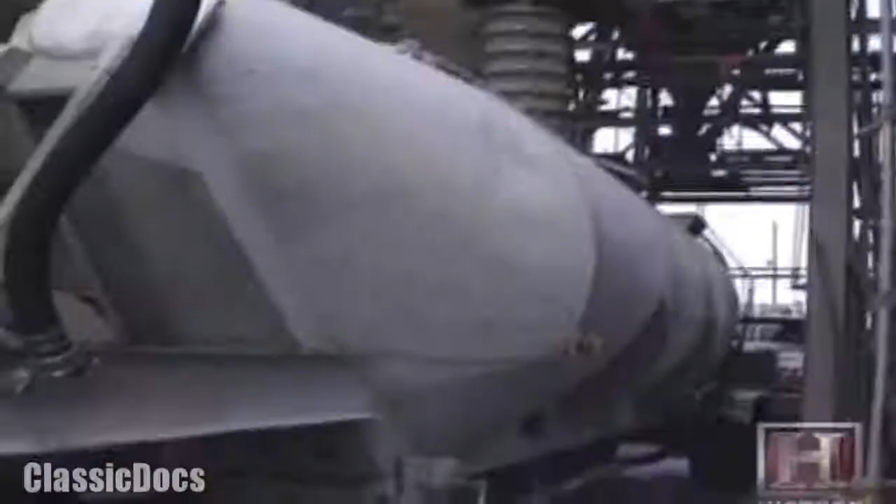The size of a power plant really has capped out at about 1,000 megawatts. And I was thinking about why that's really the limit. The boiler in a coal facility right now is the size of an apartment building, 11 stories high. Right now you've got turbine blades that in some cases are 14 feet long. The tip speed of something 14 feet long rotating at 3,600 RPM starts to get supersonic.

Today, the country's electrical needs are supplied by regional interconnected power grids that in theory ensure that power flows where and when it is needed. In practice, these grids are straining to meet demand.

It's really a series of regional grids at this point. Theoretically, you can move power from Texas to California. However, there might only be one really good path to do that. But ideally, you would want to have more options than that.

The lack of options in routing electricity is further complicated by heavy demand in summertime that is beginning to cause power shortages. It's an issue of generation. It's an issue of not having enough kilowatt hours in the system. And it's occasioned by catastrophic failures at a facility, or even small problems that take it offline for several hours.

The flip side of insufficient power generation is a countrywide lack of interest in energy conservation. I see probably less emphasis and care about energy efficiency today than I ever have. I can't even get people that I know to turn off their lights when they don't use them. Right here in my office, I can't switch off the lights in my own office, or in individual rooms.

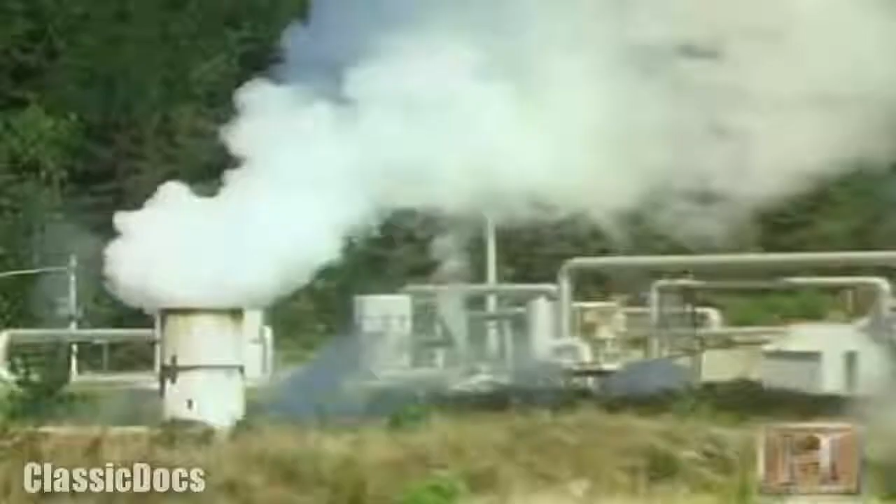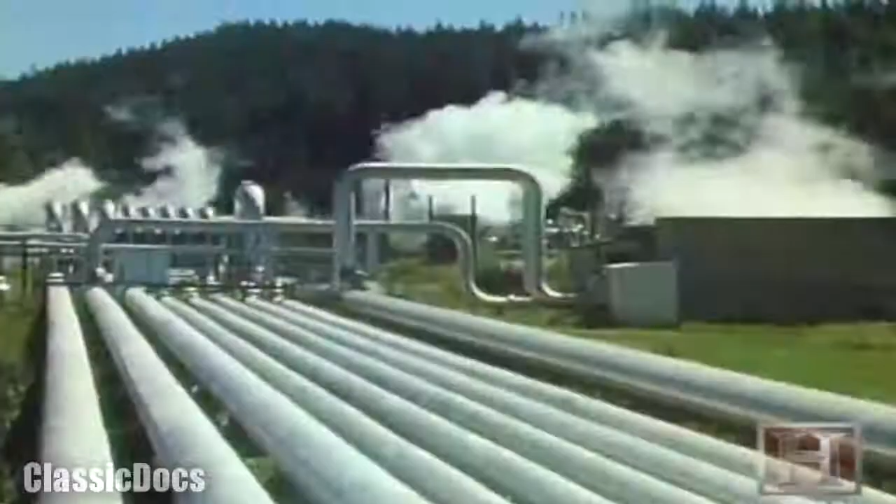At a geothermal plant, wells are drilled hundreds of feet below the Earth's surface into reservoirs with temperatures of 180 degrees Celsius or more. Although Mother Nature supplies the heat, geothermal sources like geysers are neither widespread nor are they clean. Fraught with problems in terms of, first, it's tough to locate.

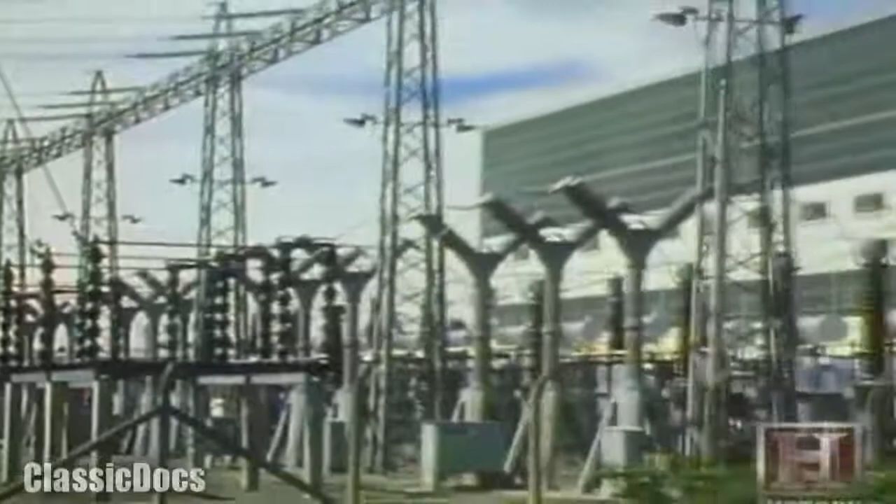There is none in the Northeast that I'm aware of, so we have difficulty using it here. With the geothermal facility, your primary pollutant is hydrogen sulfide. So the problem there is taking the hydrogen sulfide out, capturing it, and then finding some way to deal with that once you've captured it.

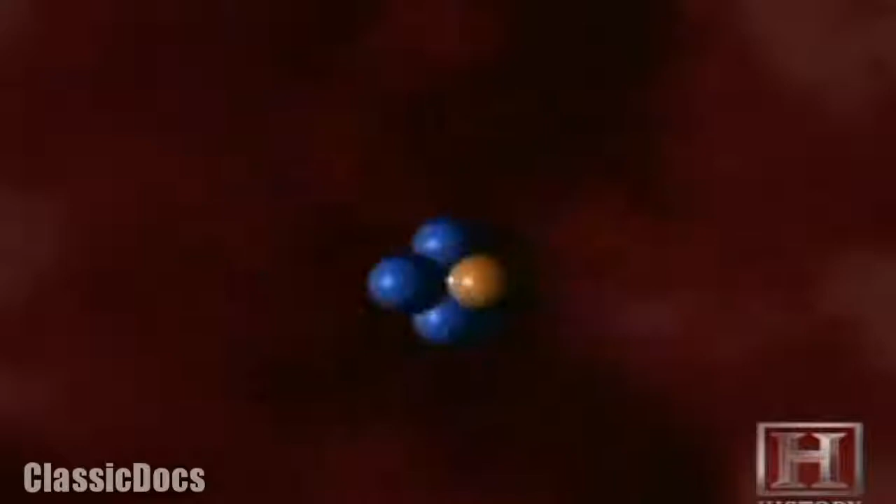The most futuristic of technologies, fusion, combines two light atomic nuclei to form a single, heavier nucleus. This generates heat levels similar to the plasma state of the sun. That's a dream for egomaniac scientists who figure that they can take the absolute most cataclysmic forces that be known to man and manage them.

There is, however, a less dramatic way to capture the energy of the sun: solar power. But the debate surrounding it is about efficiency, not safety. Even in areas of the country where the sun shines a lot, like in the desert Southwest, the technology is still very behind in being able to supply the big base load plants, like coal or nuclear plants.

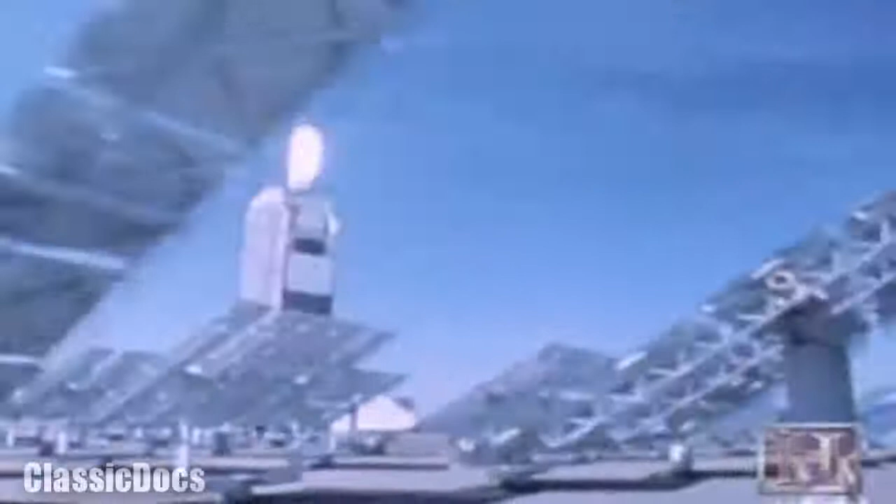For an example, to replace an average nuclear plant would take about 600 square miles of solar cells with today's technology. Solar advocates say that it is not so much the technology, but the concept of massive centralized power plants that limit solar's effectiveness. Perhaps the power plant of the future looks something like this.

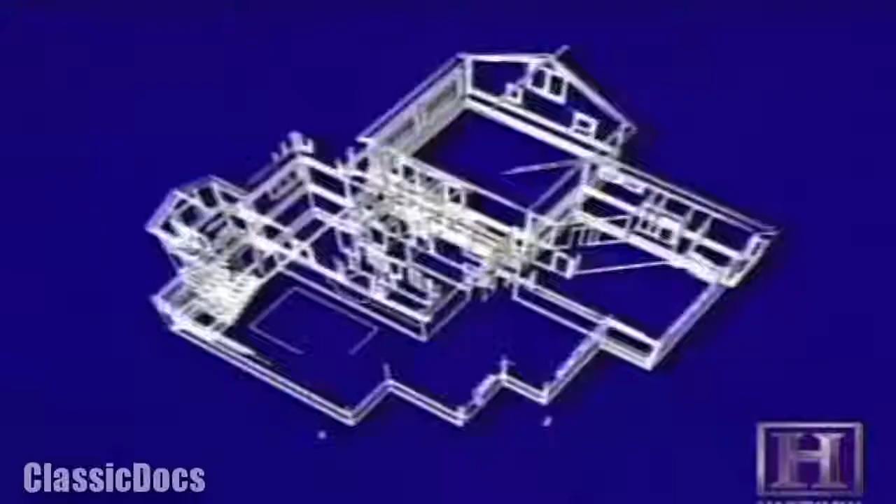A house on the Maine coast that generates more energy than it consumes. This house incorporates both solar thermal for space heating and hot water, and solar electricity for electrical production. The panels are integrated to form the finished weathering skin of the south roof, and the house pretty much exists in terms of its heating, hot water, and electrical energy requirements from the harvested energy that falls on the roof.

The house does more than just exist. It contributes to the energy needs of its community. And homeowner William Lord is quite proud of this fact. We make most of our own hot water and all of our electricity. In fact, we generate more electricity than we actually use. So the process of fitting into the environment is seamless in our case and is not disruptive.

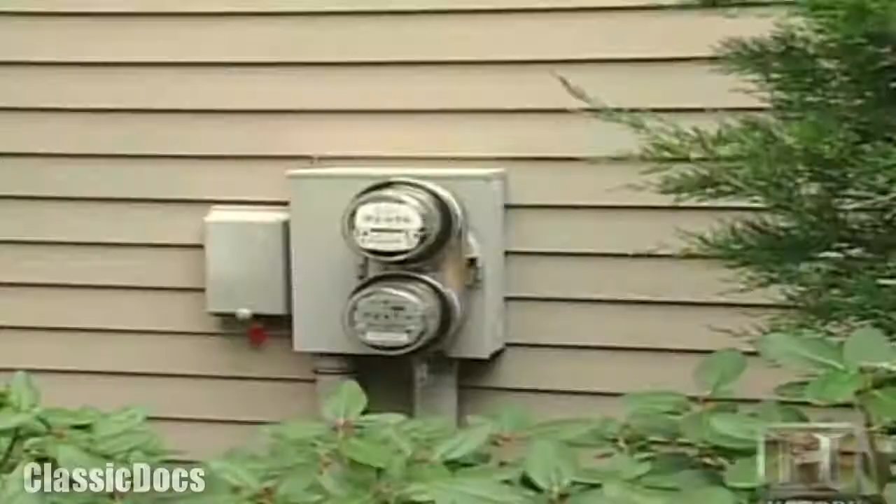Solar power not only makes environmental sense, but economic sense as well. We have 2 meters on the house. One measures the excess energy that we export to the power company, and the other meter measures what energy we take from the power company. And in Maine, we have something called annualized net metering. And the bottom line is that we essentially pay no electric bill annually.

When we built our solar house, we didn't realize we were actually creating an event. We added to that event a place where people come to learn about solar power. We have many visitors here. We added to that event our website. The Maine Solar House gets more than 1 million hits a year.

This month I'm taking a look at a house in Kennebunkport nearby. The former President of the United States, George Bush, has solar thermal panels on his roof. I think that's a great hope for everybody because clearly that is probably the best way to produce power. Taking incident solar energy doesn't pollute anything.

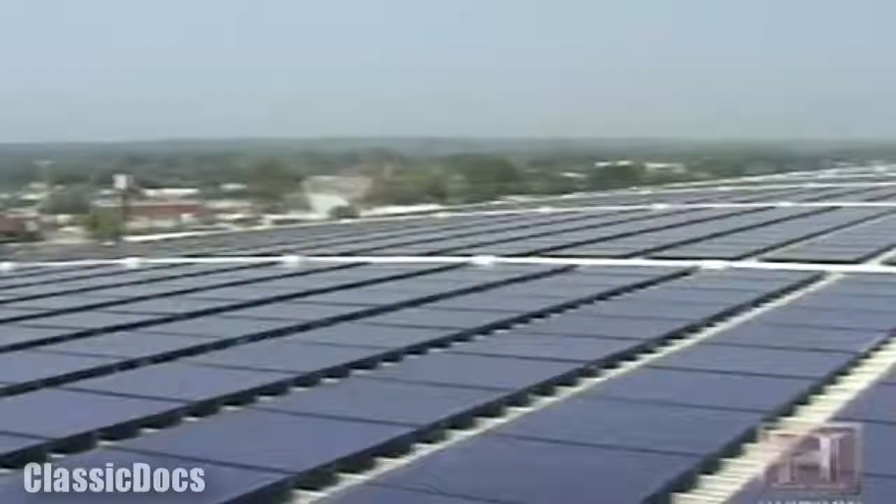The direct conversion of solar energy into electricity with photovoltaics is the most environmentally benign method of making electricity. And so that, coupled with other conversion measures such as wind energy conversion and hydropower, can combine to gradually displace conventional systems to build a resilient energy economy based on renewables.

It's not a question of if, but when. And from my perspective, time is short. We should be investing the relatively plentiful and relatively inexpensive reserves of conventional energy to build this technology bridge to the future, because these are finite resources and they are not going to be here indefinitely.